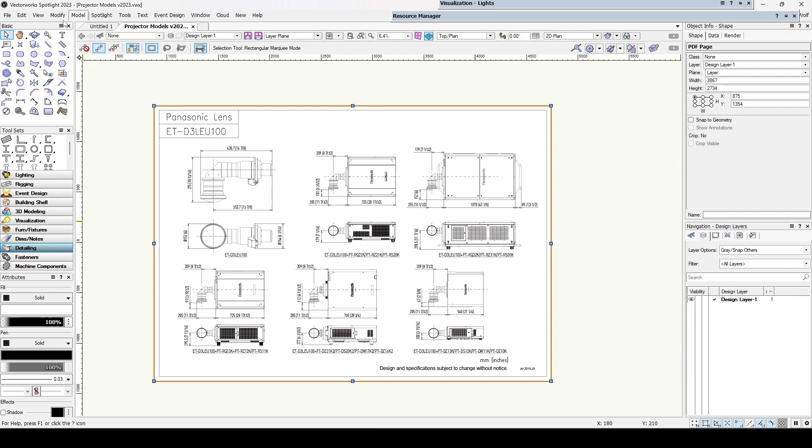So this video is on how to add a Panasonic snorkel lens into Vectorworks as just a default drop-down option for the projector. So first things first, scale the Panasonic drawing.

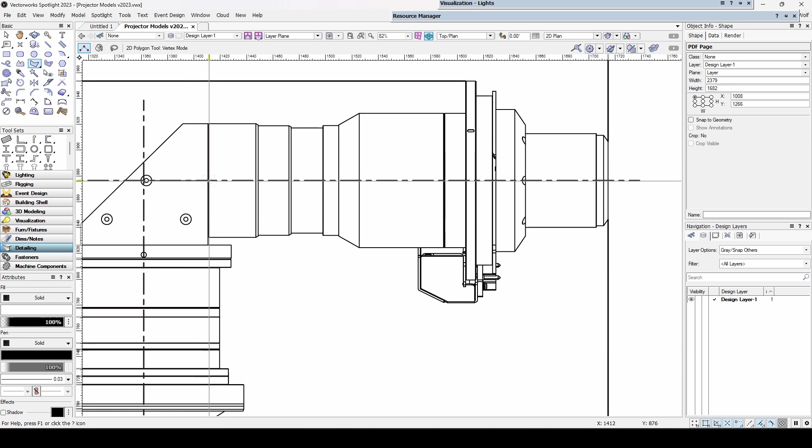What you want to do is basically trace the outside, and then we're going to sweep. So I actually do trace all the little parts. The thinking is that if this ever needs to end up in a render, then I already have basically correct geometry.

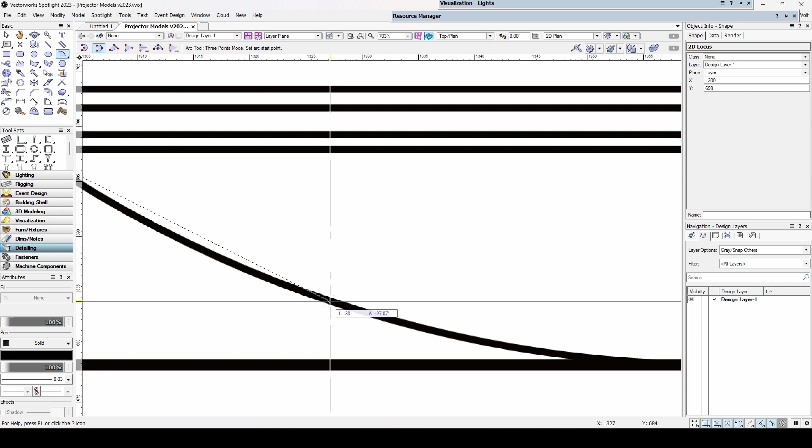So what I'm doing here is just taking an arc, so I prefer the 3-point arc, and then I'm aligning it to that first point using the smart points. So I know that that perfectly aligns between the two ends, deleting the locus that I used to place that first dot. Now just tracing the outside again.

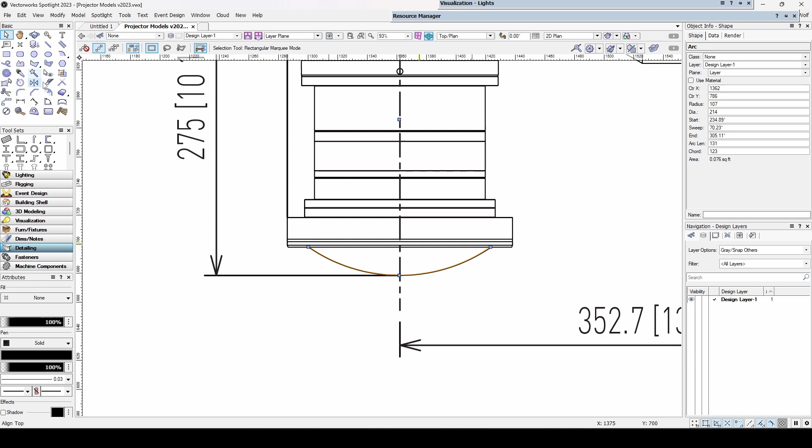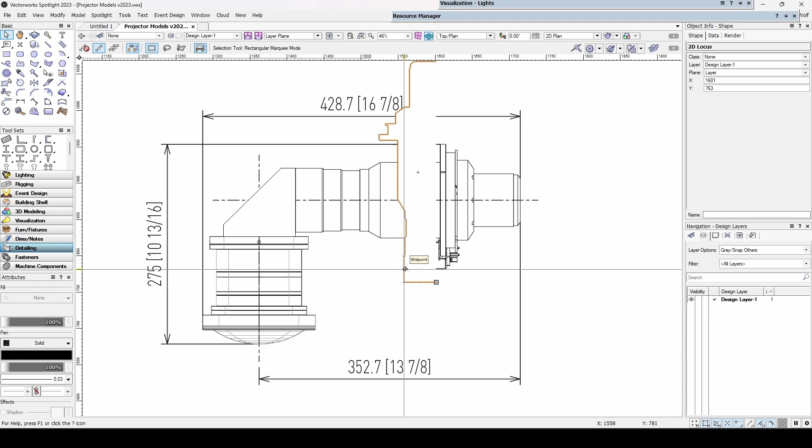So here what I'm doing is I'm just sweeping it. So my practice is that I'll always drop in the locus, that's good practice, but by default it should sweep correctly. You may need to rotate a little bit to get it right if it's inverted from what you want.

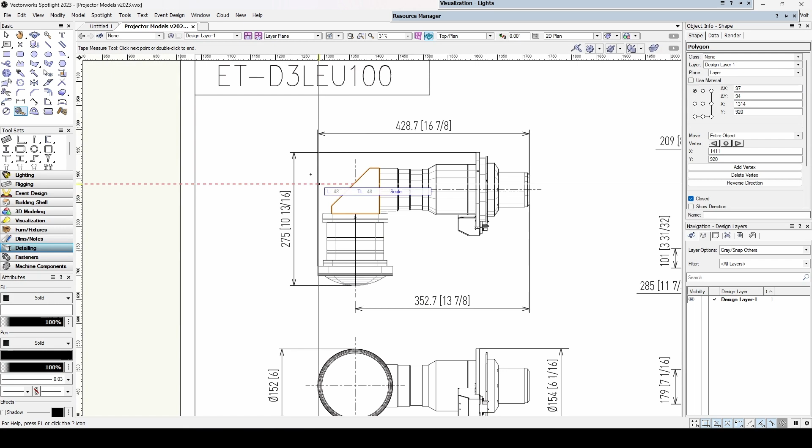So just aligning it. So here, this is just going to be a simple extrude, just measuring it. And here we're just going to align it to the center.

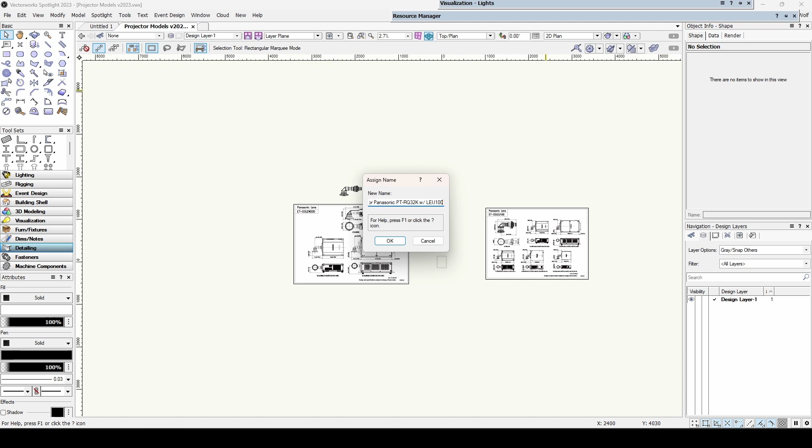The RQ32K. So we're just going to duplicate it, one for each of the two snorkel lenses. I did one off screen. So I'm going to just paste in the geometry. You don't want to make the lens a symbol because then it actually will show up just as a projector but without any of the settings.

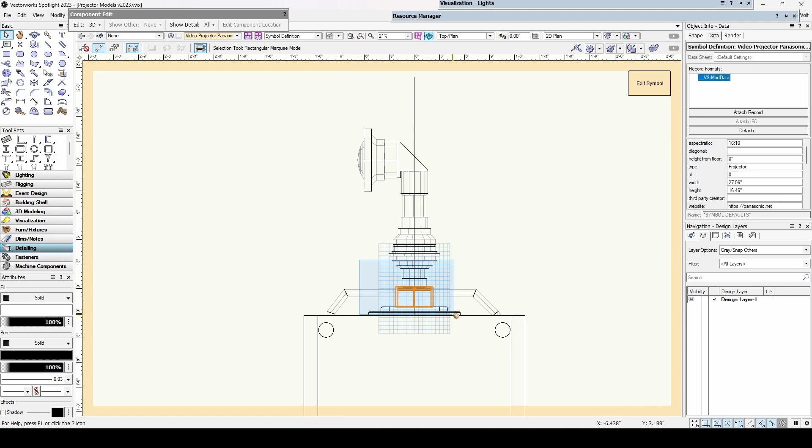So here I'm just aligning it to be on the same plane as the lens. Delete the lens, and then there's a locus that we want to leave in place, and align that lens.

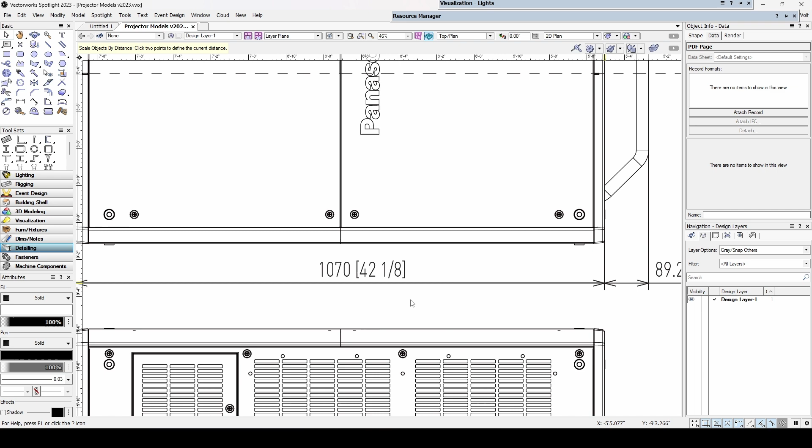So here, rescaling. This is a pet peeve of mine when they put two different scale drawings on the same page. There should be a separate page in my opinion, but we're rescaling, and that's just so we can get the offset of how far in the lens mounts.

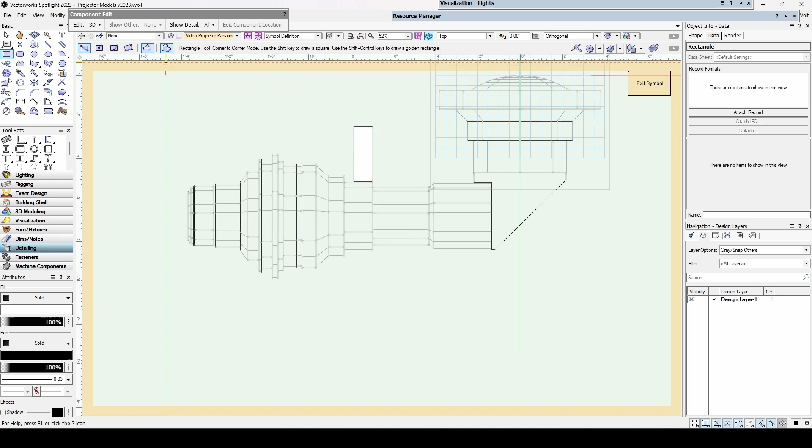Here I find the easiest way to align this is actually just to draw a rectangle. So if you hit tab and then put in your number, that will get you exactly what you want. And then we just drag the projector over to line it up. So there we go, we got a projector. So now we actually need to change the numbers.

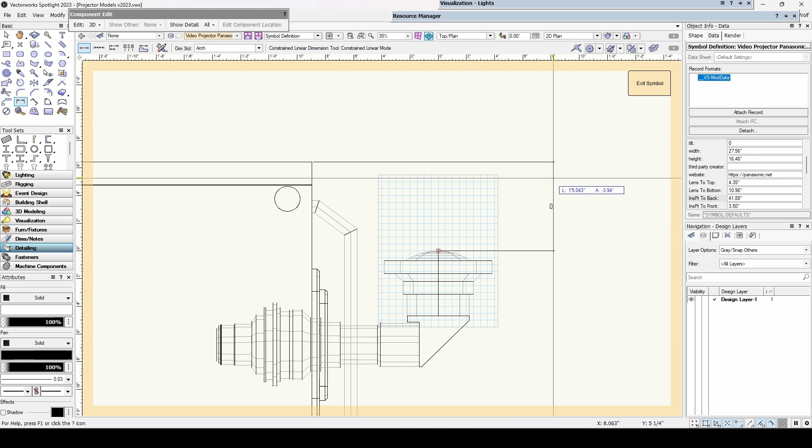So the main thing here is that we need the distance to the front and the distance to the back and the bottom. We know that the lens, because we set it to the same height as the original lens, so we know that that distance doesn't change. But the distance to the front, in this case it is negative because the projector is in a way in front of where the lens is. And then we just get the back as well.

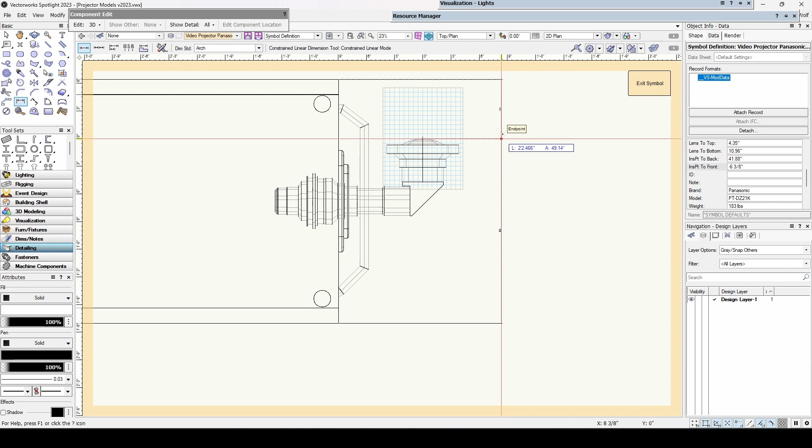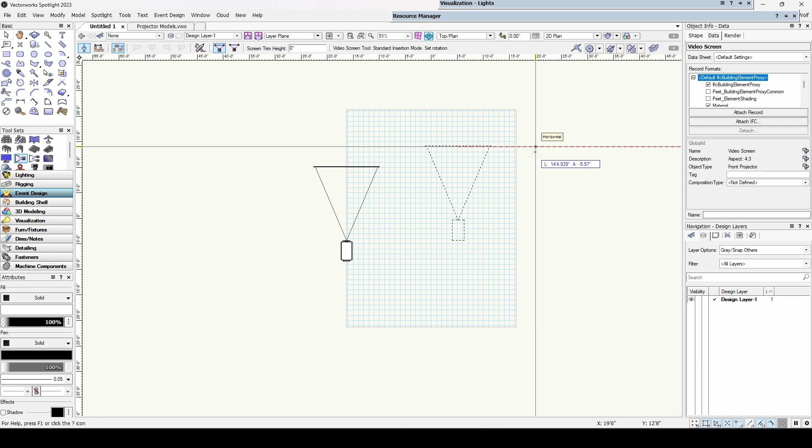Cool, so from here, really just saving as. This is the projector model. So they're either in your work group or in your Vectorworks folder. It needs to be in there, else the plugin won't read it. So you'll need to save, and then also refresh the library that it's in, or restart Vectorworks.

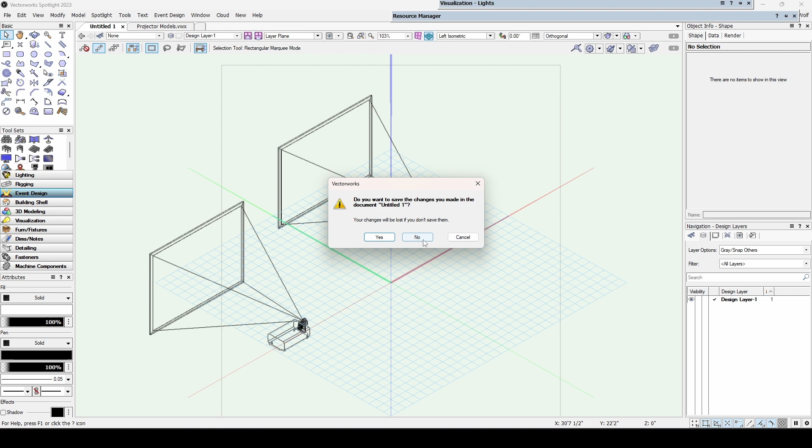So here we kind of see a mistake I made. I didn't update the 2D geometry, though the 3D geometry works. So here, just going to do a hidden line rendering of it, and there we go. Save and refresh again. I like to just completely get rid of whatever test file it is, just so that it's not holding on to any old symbol definitions.

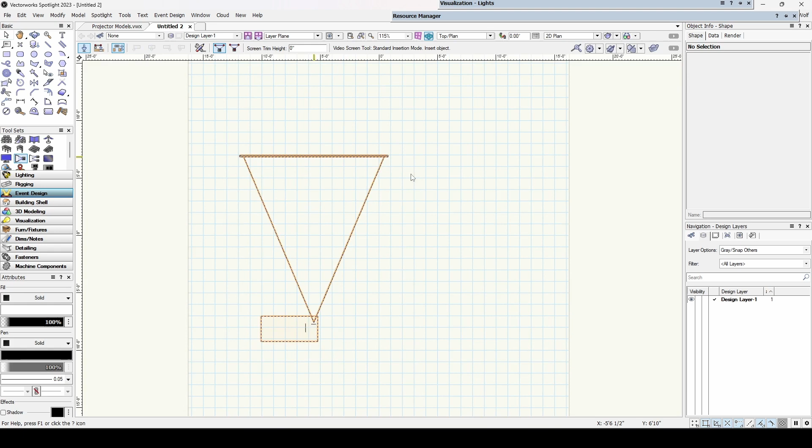And then when we drop something in, we have the projectors as an option. And there we go. So we can see it in 2D, and then we have it in 3D. Switch over to shaded, and there we are.